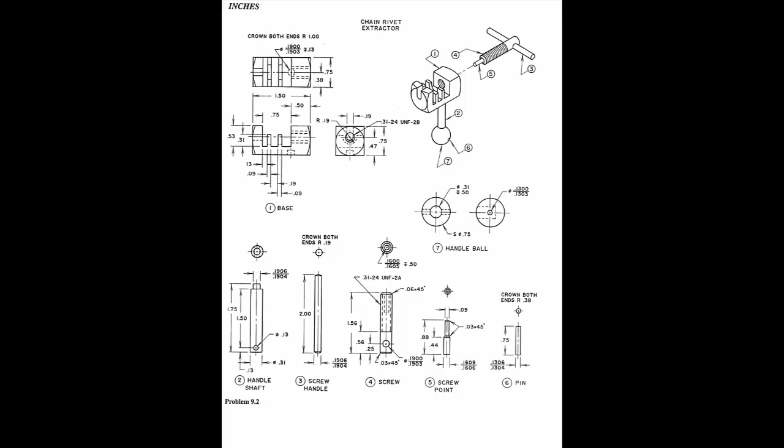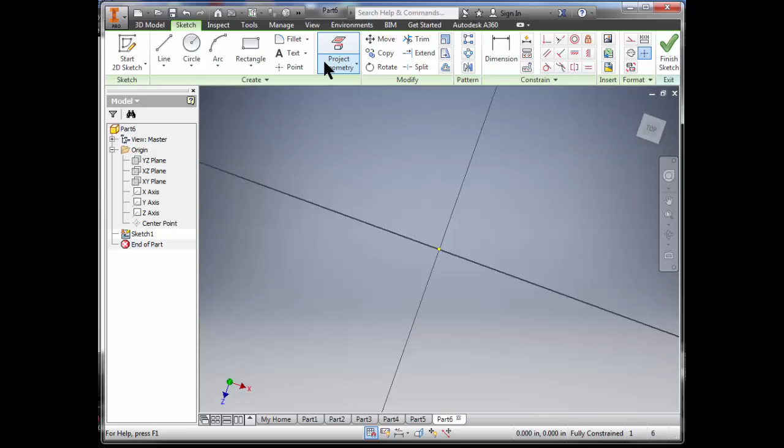This part is exactly like the screw handle part, with different sizes. Start a new part using the standard part template. Create a sketch on the XZ plane. Be sure to reorient the view cube before you start sketching.

Create a circle on the center point and add the diameter dimension. Extrude the sketch using the symmetry option and extents set to a distance of 0.75.

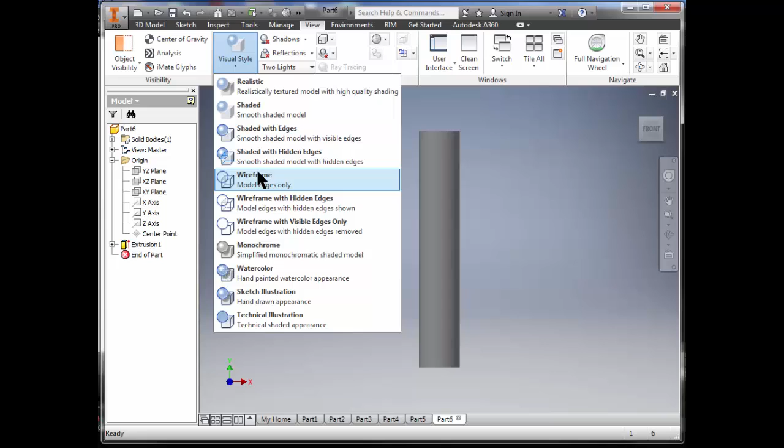Start a new sketch on the XY plane. Change the visual style to wireframe. Project the top and bottom edges into your sketch as construction lines. Add a center construction line attached to the midpoints.

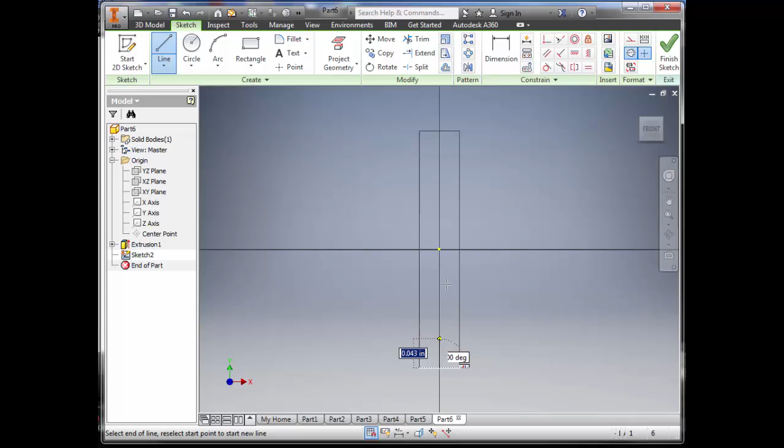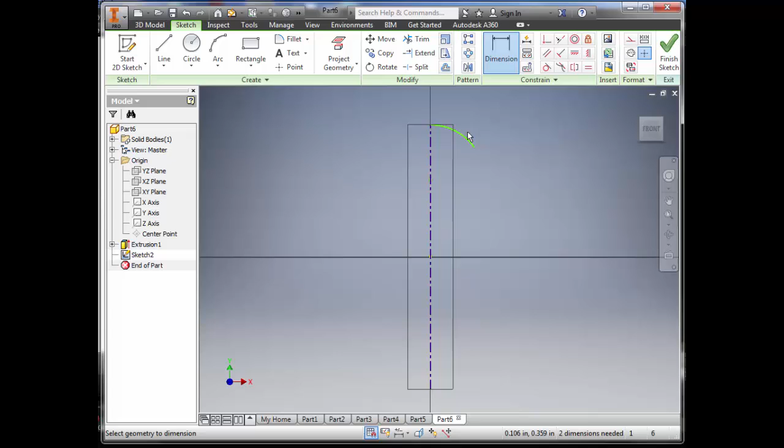Sketch an arc attached to the end point of the center line. Use the coincident constraint to constrain the center point to the center line. Add the crown radius.

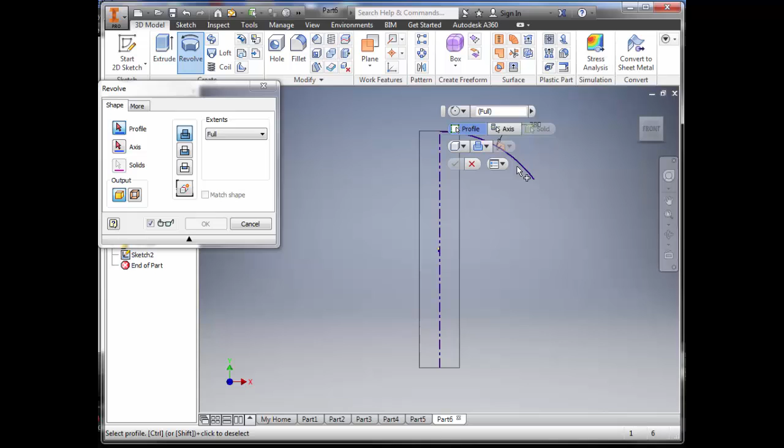Revolve cut the outside of the arc about the center line.

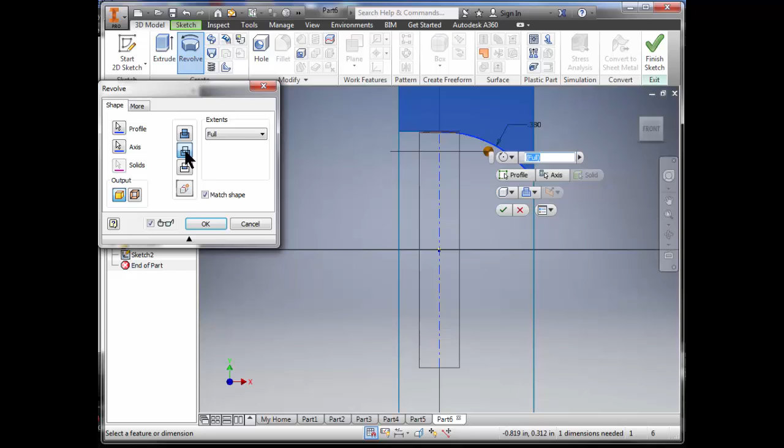Mirror the crown to the other end about the XZ plane.